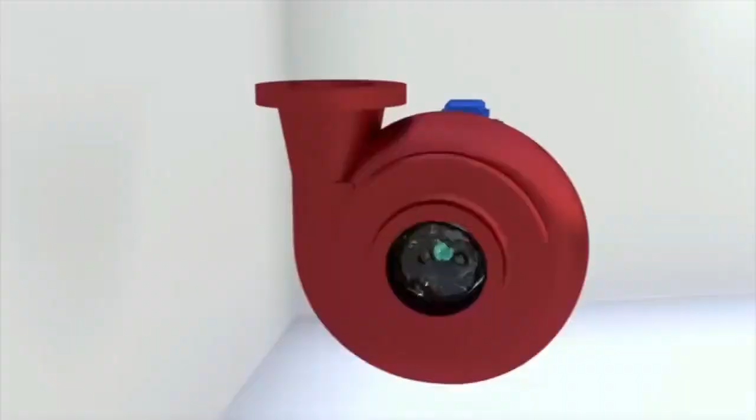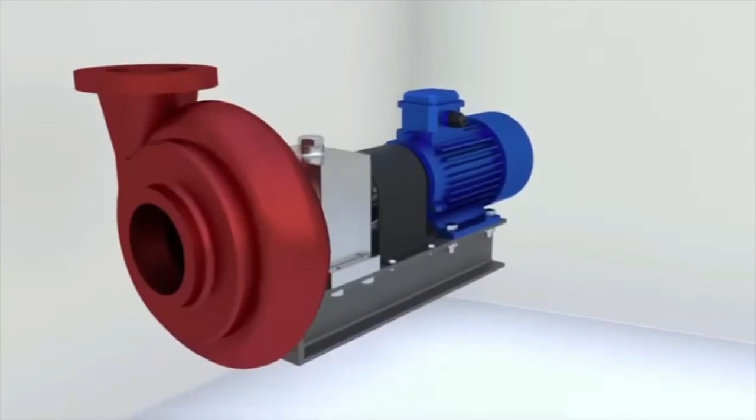How does a centrifugal pump work? Centrifugal pumps are used to pump water, oil, and other liquids. Let's try to understand why these pumps are designed to carry out the task of transporting liquids successfully.

The main elements of a centrifugal pump are the casing and the impeller, which drives the liquid. The impeller is mounted on a shaft, and the shaft can rotate on bearings. The power is transmitted from the motor, most often an electric motor, to the shaft.

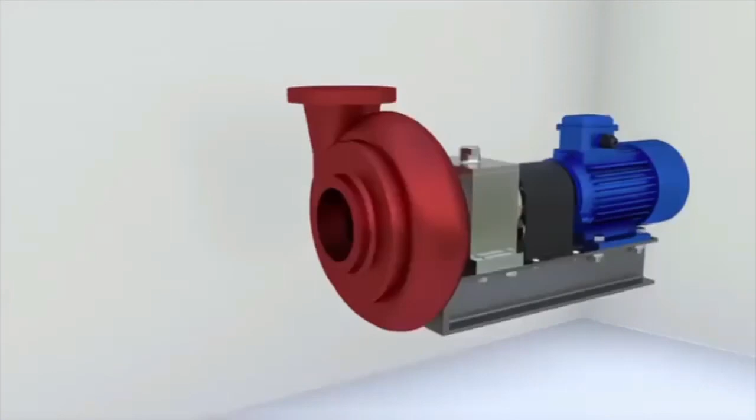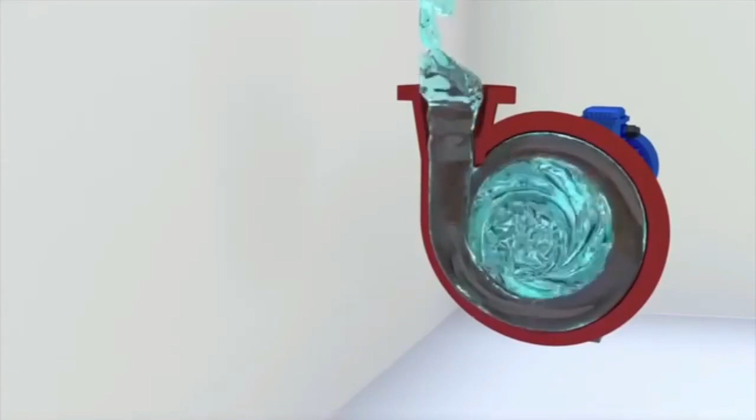The impeller of the pump rotates together with the shaft. The vanes in the impeller act on the liquid and make it rotate. The liquid particles are accelerated, and as a result of the impact of the vanes, the energy of the liquid flow is increased.

The accelerated liquid particles enter the volute, which converts part of the velocity into pressure. The diameter of the passage section of the volute in the discharge nozzle gradually increases. The fluid velocity decreases, and the pressure, according to Bernoulli's law, increases.

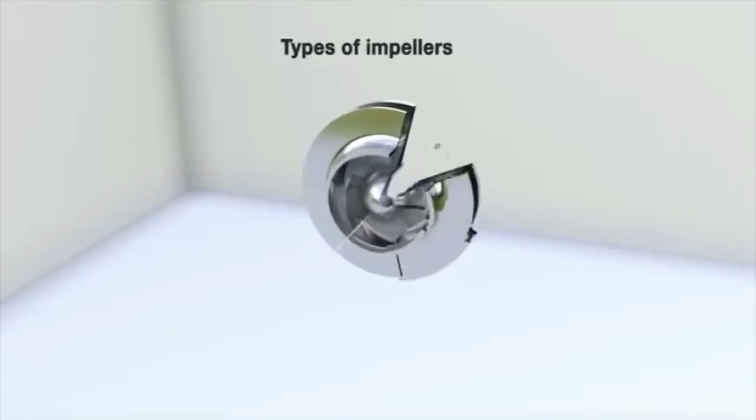Three main types of impellers are used in centrifugal pumps: closed, with back and front discs, vanes and fairings; semi-open, with the vanes free on the front side; and open, with the vanes free on both sides.

If bearings support only one side of the shaft, the pump is called a cantilever pump. It is a versatile design that is used in small and medium-sized pumps. A heavy impeller cannot be cantilevered.

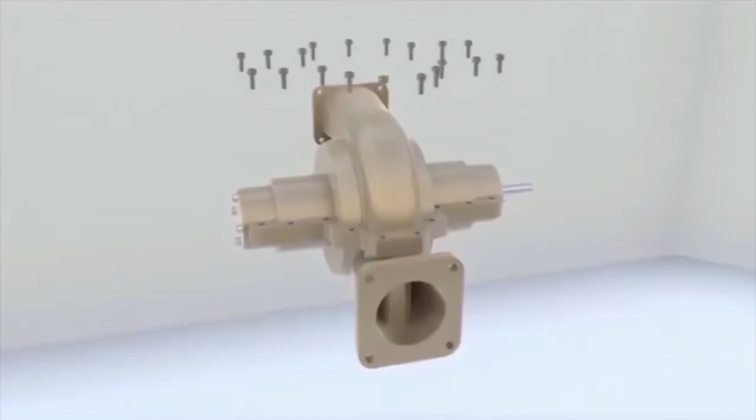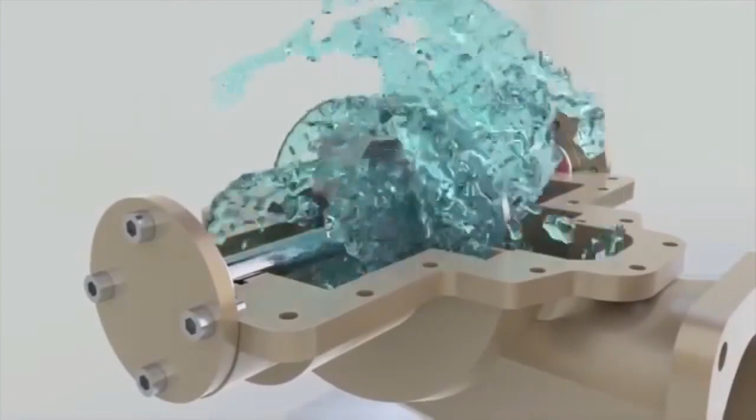In this case, the shaft is mounted on bearings and the impeller is placed between them. This construction scheme is well suited for double suction impellers, where the vanes are placed on both sides.

A double suction impeller allows liquid to enter the impeller blades from both sides. Thus, we have two pumping units without significantly increasing the weight and dimensions of the pump. This scheme is relevant for pumps with high capacities because the pumping units are installed in parallel.

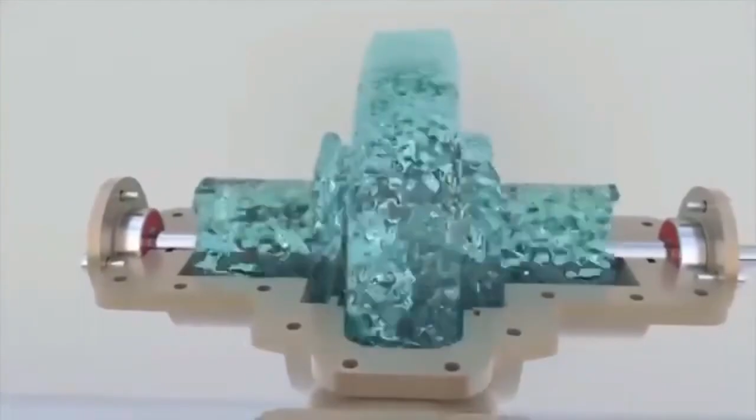Multi-stage centrifugal pumps: by installing pumps in series, the head of the liquid can be increased in the system. Pumps installed in series can be combined by placing several impellers in the same casing. The liquid will go from the first impeller to the second one, from the second impeller to the third one,

and so on. Using a multi-stage arrangement can increase the head of the pump many times over, as the impellers are mounted in series, and each of them increases the head.

In multi-stage pumps, different impellers can be used. For example, a screw centrifugal pump has an auger on the first stage and a centrifugal impeller on the second stage. When the pump is running, the liquid flows continuously into the pump casing through the suction nozzle.

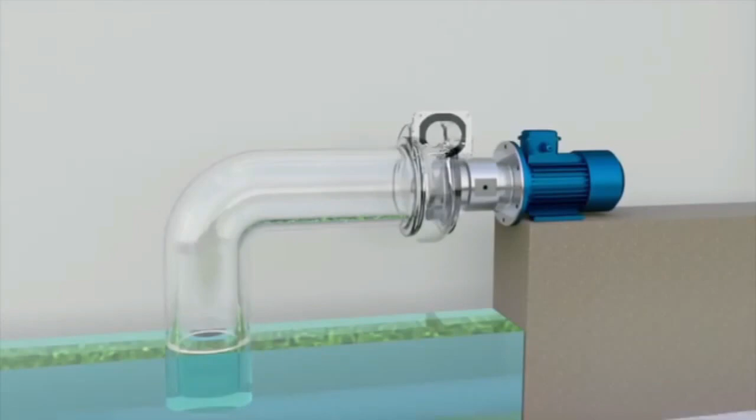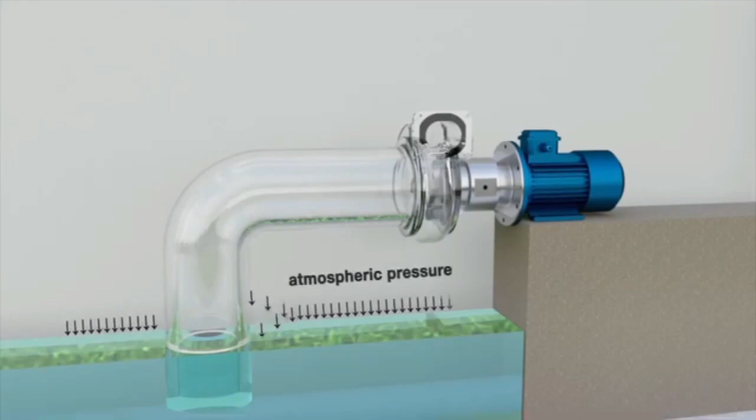But what happens if there is no liquid in the pump? For example, when the pump is first switched on, the pump casing will be empty. For the liquid to fill the pump, the pressure in the pump casing has to be lower than the atmospheric pressure. Then, the atmospheric pressure will cause the liquid to fill the casing.

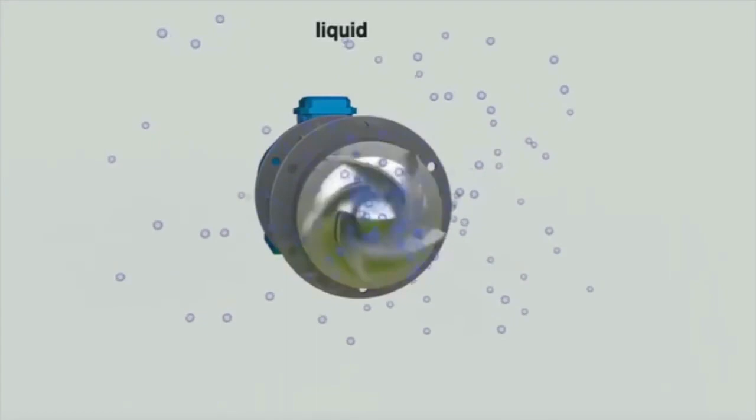To reduce the pressure in the pump, some of the air has to be pumped out of the casing. Is an ordinary centrifugal pump able to do this? The answer is no, because the particles move in the pump due to inertia, which depends on mass. The mass of air particles is much lower than that of water particles, so it is impossible to pump air at speeds that a centrifugal pump operates at.

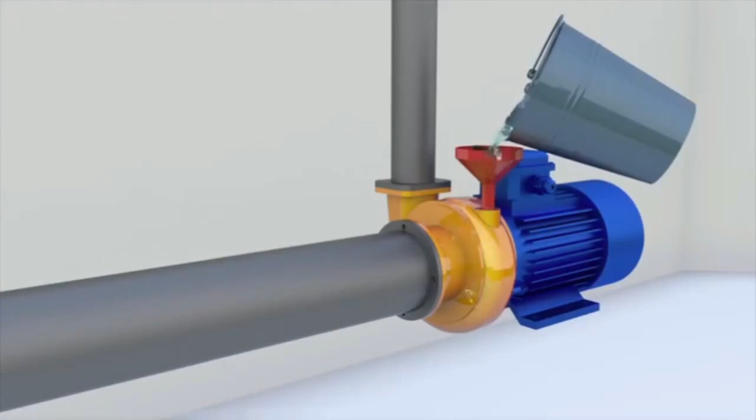For this reason, centrifugal pumps must be primed before switching on, either through a special channel in the casing or through the discharge nozzle.